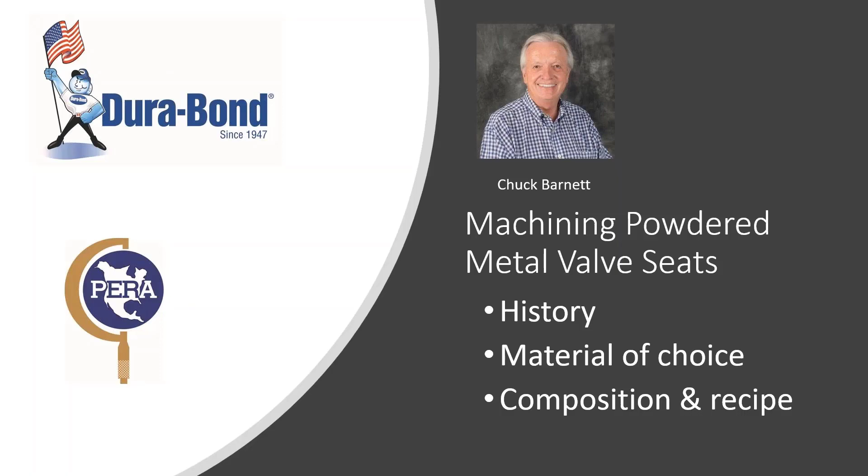Hello, I'm Chuck Barnett, the owner and president of Dura-Bond Bearings. Today, we thank you very much for joining us. We're going to talk a little bit about valve seats and the valve seats of importance going forward. Fortunately, Dura-Bond has been in business for 70 years, been making valve seats for 30 years, and the valve seats are a unique type of product that is really important for you for new technologies going forward.

So with that, we're going to have a little presentation on the pieces of valve seats, which I'm going to go through, and then we'll talk about some other things after the fact. I think all of you know Chuck Lynch through his work at Jasper and AERA, and he's been a great stalwart person of the industry. So I can tell you a lot of things about valve seats, but at the end of the day, what I call the rubber meets the road, that's where we're going to have Chuck Lynch, and he's going to talk about some of the things about machining, which is the critical part of all this.

So a little bit of the history again of powder metal valve seats. It's been around for a long time. Again, we've been making them for 30 years. It's pretty much a standard commodity in all OEs today. The beauty of the seats is it's not a product, it's a process. That process of powder metal valve seats takes a whole lot of different types of materials put together in a cold form. They're compacted at 100 tons, and in that compacting process, the material stays the same throughout the whole process. So all the way around the valve seat and all through it is the same thing.

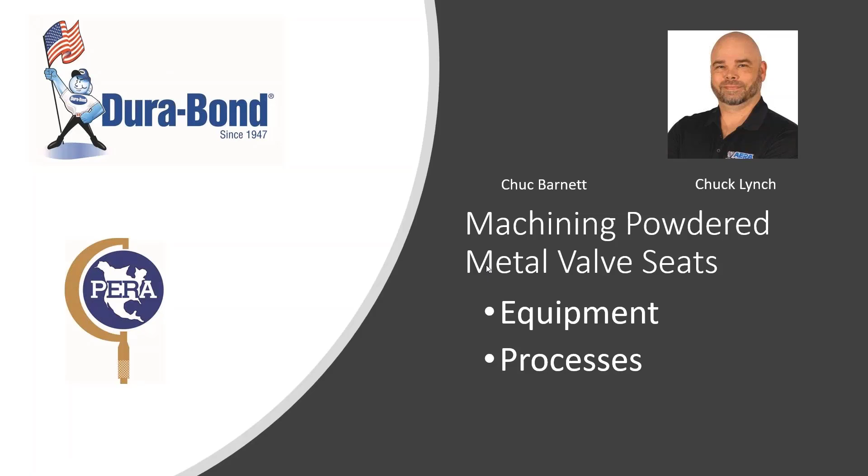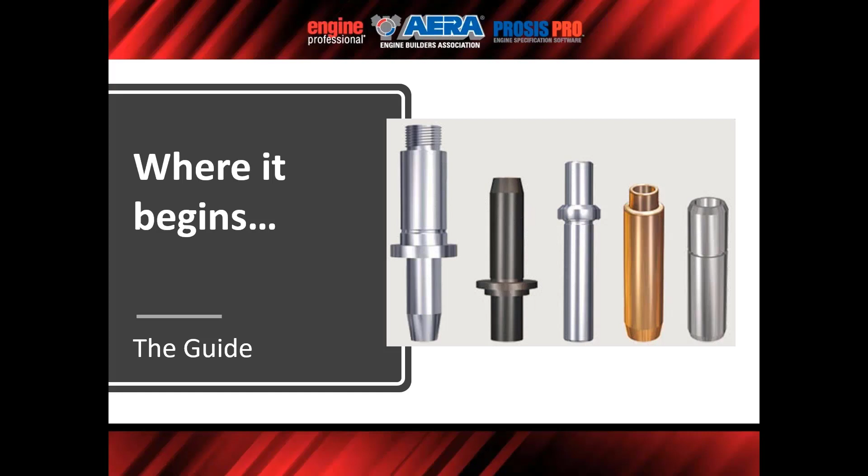All right, good day everyone. Let's get started with where it all begins, because I know there's several people listening today that we've had these conversations with multiple times. We chase after cylinder bore finishes and making cylinders absolutely perfect. We'll fight valve seats, and oftentimes it begins with a guide not being properly machined or prepared for doing valve seat machining.

You cannot produce accurate valve seats if you do not keep the guide processing under control. Can't speak to that enough—it's a super critical point of trying to get good valve seat machining. If the reference point for the seat is subpar, the seat quality will suffer. The following points are some of the symptoms that you will treat if you do not address the root cause.

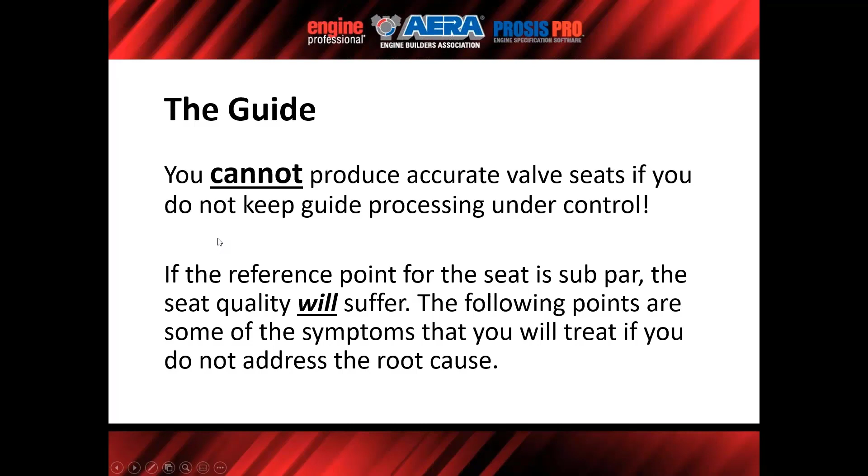So let's get into the guide types. We've got powder metal, which is the predominant material of choice in OE head castings now. Oftentimes we have to deal with the fact that they come in powdered metal, and we may not have that as an option. So when we replace a guide, we're going to be way off of alignment from where they were at the OE level. There's also cast iron alloys, and bronze alloys—solid, or in many instances, people will actually put a liner in a guide. The guide material can impact the amount of stem-to-guide clearance required, but it should not be considered when establishing your taper and out-of-round tolerances for the ID of the guide.

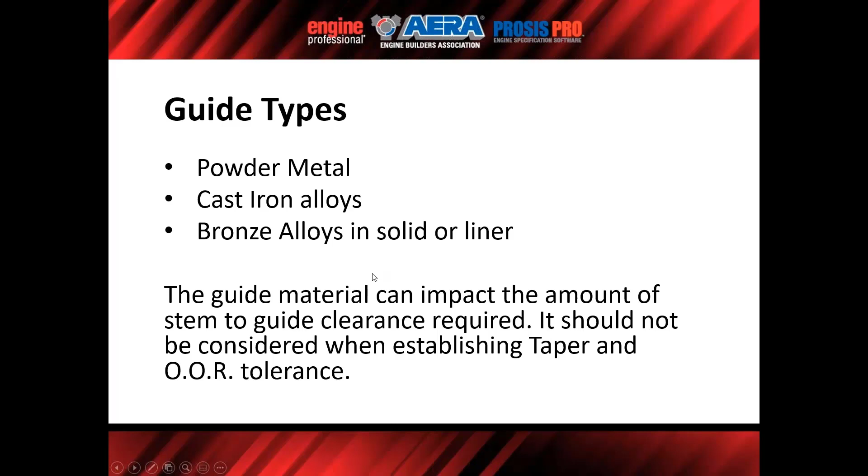So basically, your geometry allowances shouldn't be affected by your guide material choice. But again, it can impact what you choose for stem-to-guide clearances.

This would be a typical guide ID and taper tolerance. You'll see, based on whether we're using SAE or a metric specification, about 4 to 5 tenths maximum variation allowed in the guide. The further the seat is away from the guide, the greater the issue of taper within the guide. If you have that amount of taper, it's just going to aggravate your ability to locate—say if you're using a seat and guide machine, or if you're grinding seats, it's going to aggravate your ability to locate on that guide. We speak often to tapered pilots, but that's not really the purpose of those—it's more about getting to secure the pilot in the guide.

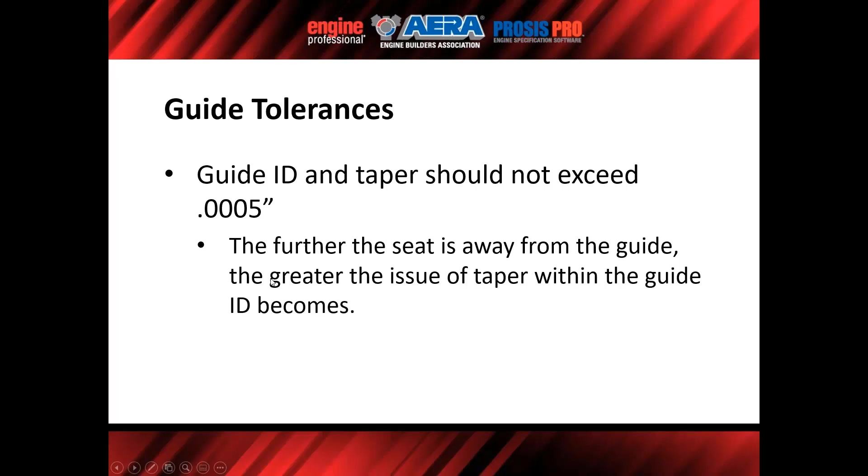So: seat issue, guide cause. Random seat runout measurements, chatter, differing results if you regrind or recut a seat, poor or varying vacuum test results. Let's start at the top—random seat measurements or runout measurement.

If you have guide sizes that are all over the place, and you're trying not to select multiple pilots for productivity's sake, you can really chase locating issues. That said, it's probably going to be indicated in your seat runout, but if you're not measuring seat runout, you may have leakage issues that you chase.

Chatter—again, it's about rigidity. So you want to have good straight guides, good pilot selection, and all of the things that you can do to make your setup extremely rigid will impact your finished seat results. Chatter, undulation—things that we'll talk about in some future slides.

If you cut the same seat multiple times or grind it, and the high spot moves around, there's a list of things that could be the problem, but you have to have a consistent, straight, true round guide to locate—to use the term repeatability and reproducibility, R&R. You need repeatable and reproducible results, and you have to have a straight guide before you can make seats that'll yield that.

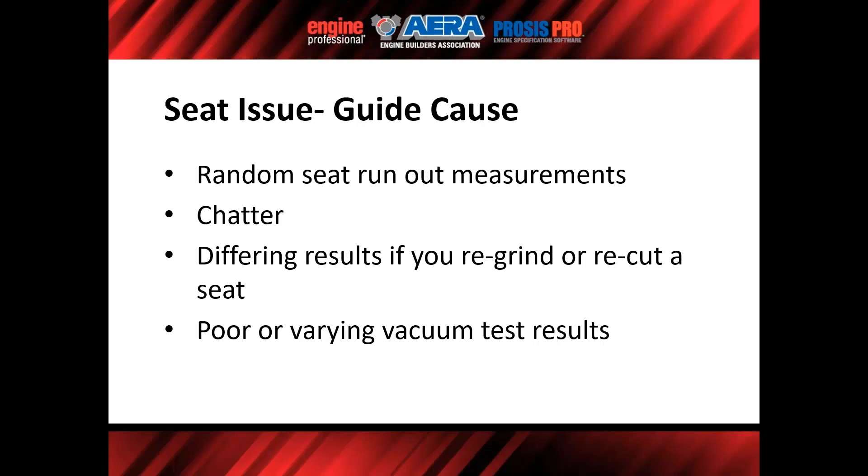Back to that—pilot selection should be an indication of the quality of the guide. If you're using more than 2 pilots per application, unless you're using the half sizes... as a rule, most pilots are 4/10 of a thou in separation from one pilot size to the next, but you can actually buy half sizes that are about 2/10. The guide sizing is not controlled well if you're using more than 2 pilots—if you think about that, that's about 8/10. Well, if my stem-to-guide geometry is telling me plus or minus 4/10, then I really shouldn't be using any more than 2 pilots per engine family.

If that's the case, go back and take a look and try to straighten up the guides. The pilot should be clean and free of debris when moving bore to bore, so centering is not affected, or the guides could be damaged due to seized pilots. So typically, as you're moving from hole to hole, if the opportunity presents itself, take a rag and wipe off any debris that clung to it.

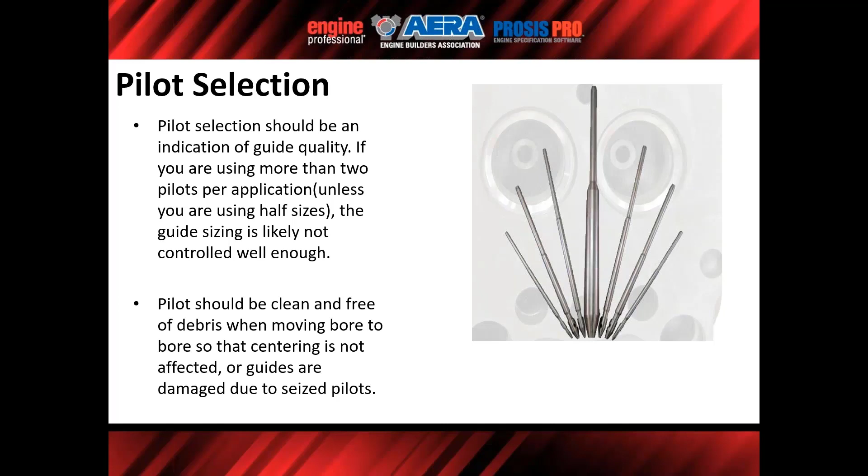You're using lubrication a lot of times, so it's pretty common that you're going to have hard particles. As we talked about powder metal seats, some of those hard particles, if you carry that into a guide bore and spin it against a carbide pilot, you can do a lot of damage to a valve guide.

So moving on to the valve seat, and I do want to mention, we talked about this prior to the presentation. Feel free to interrupt at any time, that way we're thinking about that particular subject matter at that time. So if you have any questions, please interrupt.

So what is the purpose of the valve seat? Of course, number one, provide a combustion seal. Very important part, as Chuck mentioned in his part of the presentation, transfer heat from the valve head into the casting and of course to the cooling system.

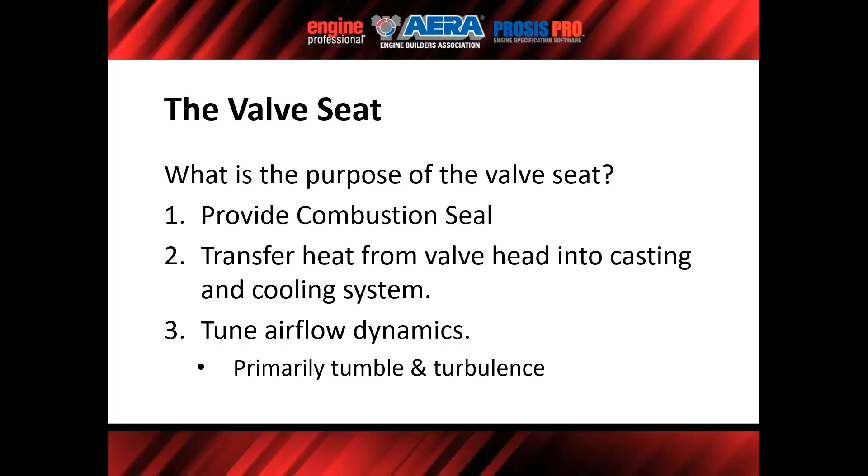And why do we have different seat angles? They tune airflow dynamics, primarily tumble and turbulence. Swirl is more controlled by piston and runner designs and so forth. But tumble and turbulence is very much needed in certain applications to help atomize fuel, so the valve seat can be instrumental in improving those characteristics.

So the primary function of the valve seat being combustion seal, the following points are important to ensure that function. A common rule is valve seat runout or concentricity is less than 1/1000th per inch of seat diameter. But here's the caveat to that.

As we look at engines today, we're seeing tighter and tighter stem-to-guide clearances. So if you have less stem-to-guide clearance, you're going to need to allow less valve seat runout. If you have a seat or valve that's 1.9 inches in diameter, and a guide set up at 1/1000th stem-to-guide clearance, the valve manufacturer also has a tolerance on how much runout they can put on the valve.

You are definitely going to have stem-to-guide contact, and that load is going to accelerate guide wear. So really think about what your stem-to-guide clearances are when you're setting your rules for valve seat runout.

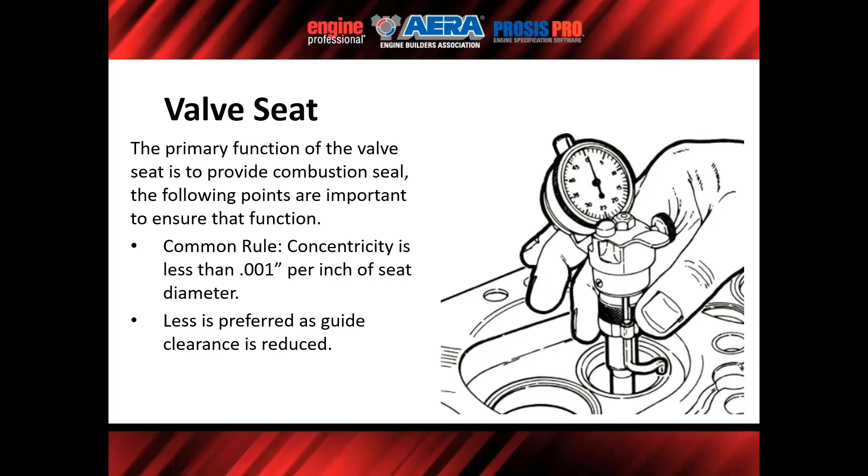So valve seats are often cast alloys, but powder metal or PM products are increasingly common. In automotive they've been around for a long time, but now you're seeing them in heavy duty. Chuck mentioned the Power Stroke diesel. In industrial applications, a lot of those were cast alloys, stellite, real high nickel compositions or something. Now you're seeing PM products in those applications, and they hold up very well.

As Chuck mentioned, you can use materials that are non-weldable, so you don't have the micro welding and the seats being pulled apart. Years ago when the LP conversion started, you did away with valve rotation because you knew you'd have micro welding as it tore material from the valve seat. That material would rotate, and now that's the only area actually contacting, so you'd have extreme leakage, and now you've got this piece of material stuck to the valve working like a hammer. You've lost seat contact, heat conduction is lost, and now this little tooth goes around and picks the seat to pieces.

So it's nice to see we've progressed with these compositions that will live in any of these environments. I think everybody wants this. Had a conversation just this morning about seat selection, and there is no single seat that's correct for every application. I think we've tried and tried and tried. The reality is, given the products, how these engines are engineered, and the application they're going to be applied to, we haven't got to the point where there's a seat that's correct for every application.

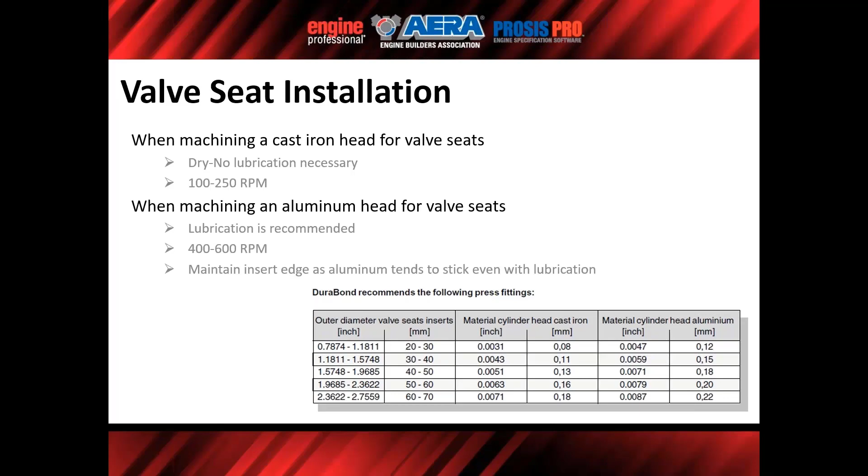Hey Chuck. Yes. Can you go back to the two slides prior when you had the copper seat? We have Claude asking, can you explain the copper wafer? Is this on top, bottom, or sandwiched? And how is this machined to spec? Okay, so actually this is one of the Dura-Bond...

This is one of the Dura-Bond advertisements that they use. This copper wafer is part of the manufacturing process. When they get the near net seat, it's typically 15% copper infiltrate. That gets put on the seat face surface, where it would contact the valve, in the manufacturing process. Then as it goes through sintering, that copper actually leaches into the seat and gets pressed, so it's integrated. This is just an illustration showing a copper infiltrated seat, taking a typical seat composition and adding this copper. It's not going to look like that when you open the box. I hope that answered the question.

I think it does, Claude, but if it doesn't, let us know please. Thanks, Chuck. Sure.

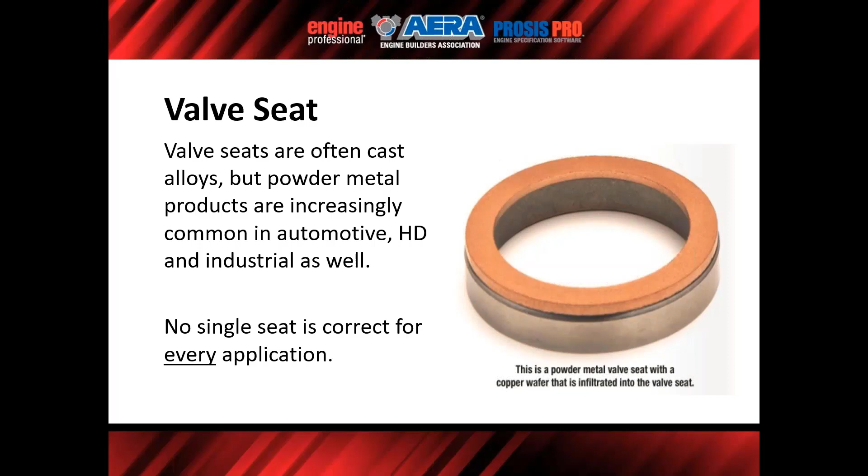So, methods of machining valve seats. By and large, I think most everyone has moved or migrated to cutting valve seats, but there are many still grinding seats, and effectively so. It just takes patience, practice, and knowing what to look for, and you have to check a lot more. A form tool is always going to put the seat in the same place; if you're grinding, you have to make some adjustments. And because you're creating a lot of abrasive, you've got to really watch your tooling.

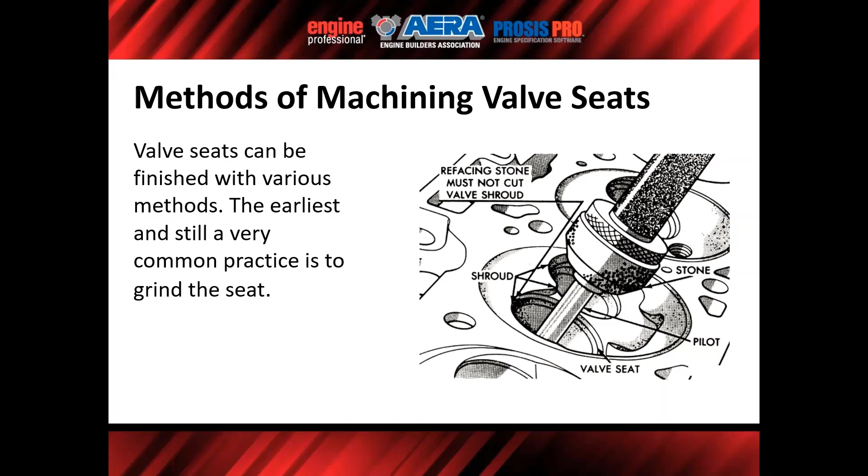If you take a look at grinding, consider this question: can I hone that Duramax with my vitrified abrasive because it's got those hard spots in the cylinders? Well, think about this: what is the most precision process that we ever do? When something gets really, really precise, we grind. So if you look at honing with a vitrified abrasive in that Duramax application, I'm really just reverse grinding. It's very capable of doing that. And when it comes to grinding valve seats, even though it takes a lot of effort compared to a seat and guide machine, you can still do it, very effectively, and you can yield all the parameters you need to ensure a good seat face contact.

Moving on here, when grinding valve seats, the following points can help you select the right abrasive for the seat type.

I know there are a few different suppliers out there. With Goodson on the tech line, they'll have a lot of conversation with you about the seat materials and what you're trying to do. They have people on staff that can help you select the right abrasive for the seat if you're kind of new to this.

Steel pilots can be quite the cost advantage, but they are easier to bend. The bad thing about carbide is it doesn't bend, it's going to snap on you, and they wear more quickly than carbide, so you can't reiterate this enough.

When you start chasing your tail, we tend to not like the sticker price of some of the tooling we have to replace, and think 'it can't be the tooling because it's always been good.' Well, it doesn't just wear out overnight, so you've got to keep an eye on your tooling for damage and wear.

Simple things like orientation matter too. If you're trying to get the max life out of something, you need to keep track of which side you always put to, say, 9 o'clock or something of that nature. If you have random setup processes, you can chase your tail, because that's just more variables thrown into your operation.

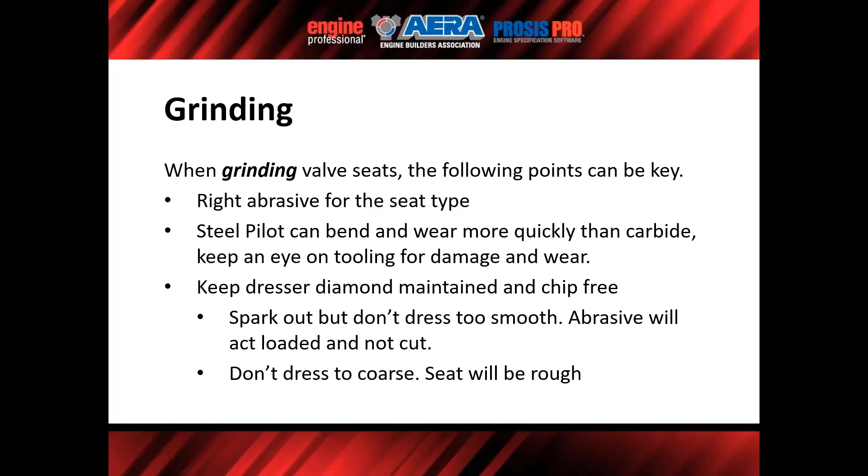For seat and guide machines, I've listed the most popular ones that are out there and being used today, and members of the group that we work with every day. So you see Rottler, Comec, Rottler Machines, Serdi, Newen.

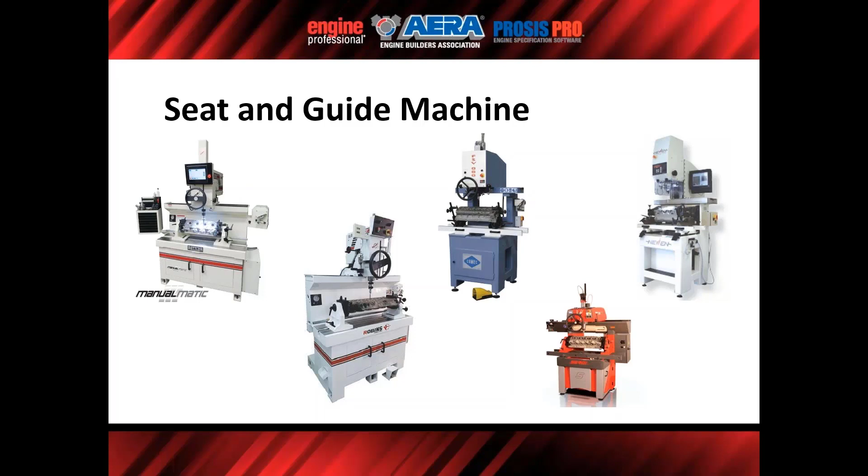Now, seat surface. I borrowed this slide from Newen—I actually like it. It gives us a good illustration of what happens sometimes when we're cutting valve seats. The desired surface is without chatter and undulation.

This is true of both the valve and the seat. Typically, you're going to look for a roughness of 30 RA or less. That'll be called out on most of your drawings.

Measuring valve seat surface finish is pretty tough. Some of the OEMs do actually measure that, but for the average guy to go out and buy the fixture that'll hold his profilometer to measure valve seat roughness—it's just not commonly done. But there are parameters around valve seat roughness.

The seat width is based on the application. You're not going to run an intake seat width as wide as you do the exhaust. Why is that? Because the more contact area, the greater the heat sink, so I can dissipate more heat.

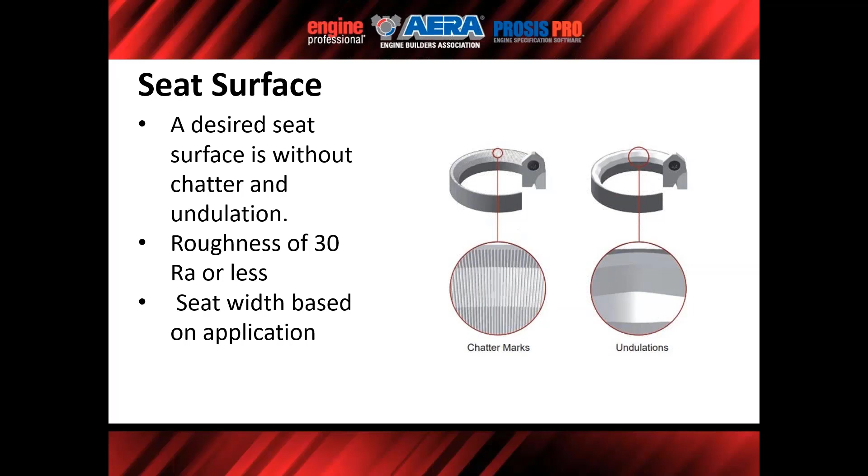With seat and guide machines with steering wheels, feed rate cannot always be controlled accurately. That said, the seat diameter and tooling grade will still control the desired RPM.

This chart illustrates suggested speeds for carbide form tools. You can take a look there—seat OD and RPM range—and then look at some cutting angles and relief angles. If you take a look, Serdi's got some unique tooling now; they've got more rigid, heavy-duty stuff.

Robin Cheerer with Rottler Machines has actually been working on some of the Ruby material as of late.

That's something we're constantly working on in the industry to try to improve longevity, so that you don't have to sharpen so much, because that is an area where we start to create issues with our sharpening processes. Some places have it really nailed down because they have very specific equipment, and then some shops it's more of a manual operation, so it lends itself to potential inaccuracy and a great amount of variability.

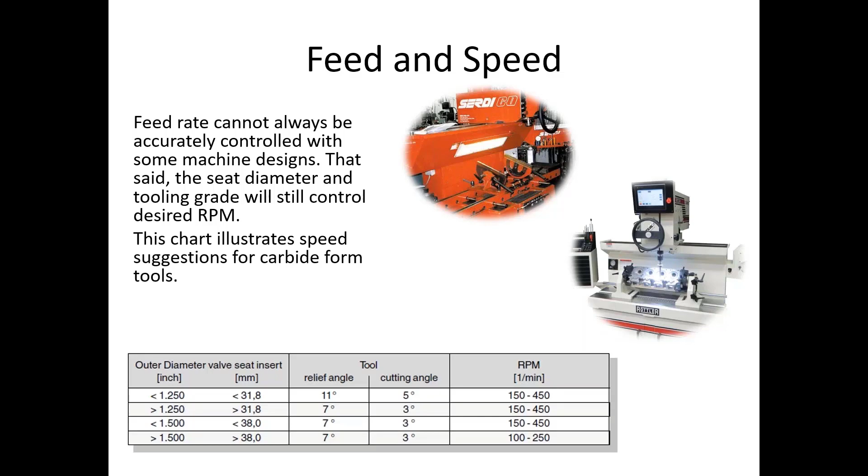Some CNC machines are designed to generate a seat profile using a single point insert, which may be carbide, Cermet, CBN, etc. With that, you're going to run significantly higher RPMs.

Typically you're using super abrasives in these types of machines. So you'll see much higher RPMs, and the feed rate you can definitely control.

So you'll see that rough feed rate of about 4 to 5 thou. Think about that when you're using just a carbide on a machine with a steering wheel, where you have an insert profile that engages at 300 thousandths.

This particular insert, in most instances, has a 16 thousandths nose radius, which means you're probably only really contacting at 4 to 5 thousandths.

They actually have some profiles where you would machine on the bottom edge of the insert for your roughing, and then travel from the inside diameter to the outside diameter, so that you're using the opposite edge of the insert for the finishing process.

So it's almost like you have two separate cutting surfaces, and it's only cutting about 5 thousandths of material, as opposed to 300 to 400 thou.

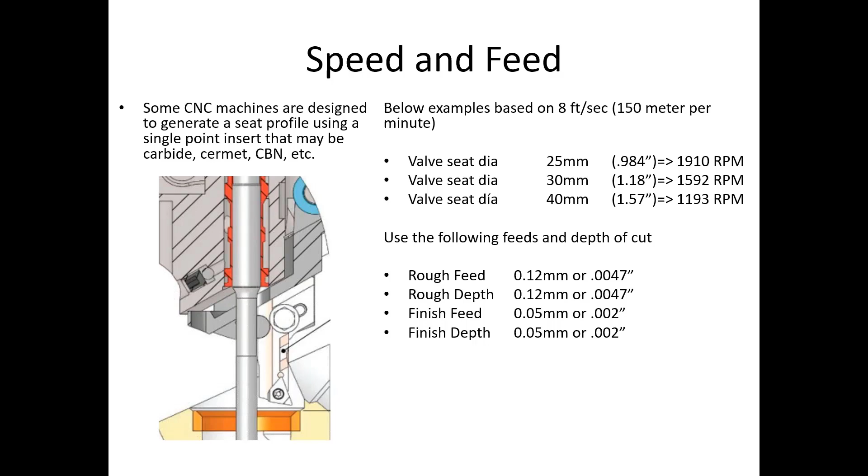As cylinder heads have evolved, so has the need for tooling. Some of the challenges are, of course, hard material, small stem diameters, and challenging seat profiles.

Sometimes we don't think about this, especially if we're a custom shop. It's something we actually added to the process: okay, how many valve seats per combustion chamber? Because I don't just look at that as an inline 4-cylinder anymore.

What if it's a Volkswagen with 5 valves per chamber? That's a lot of seat cutting.

So I'm asking my tools to do a lot more, and then you have head castings that are odd shapes and are hard to secure in the machine.

Going back to what I was saying earlier, if you run a live pilot machine in the tool holders, anytime you put a pilot in a tool holder that has a set screw pushing it off to one side, it's hypercritical that you know the condition of the bore you're putting your pilot in.

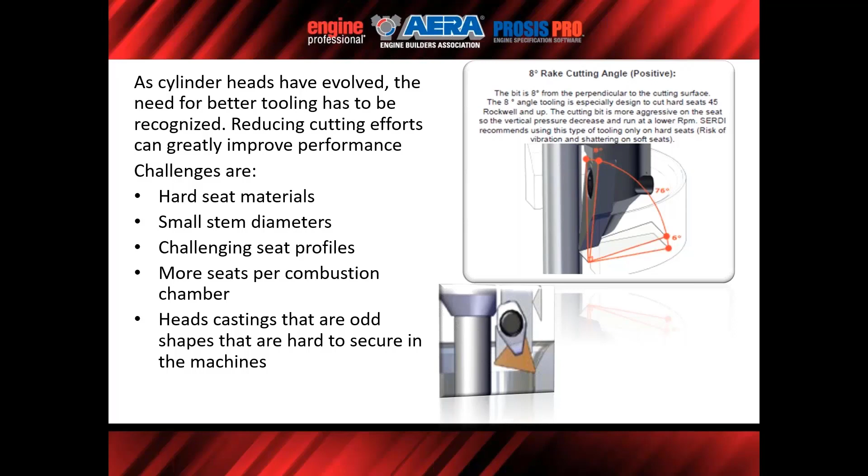So again, it keeps going back to, you've got to know your tools and maintain them.

So performance - poor sharpening can produce poor seat quality. There's also the toughness of the material to consider.

There are seat alloys out there that have a lot of nickel in them, and much like the aluminum we were discussing earlier, that's a tough, stringy material. What does it do?

It bonds itself to that insert, but that tough, stringy material also micro welds to the seat.

And you drag these chips in there, and as it welds itself to the seat, you leave these channels in the seat. Now what really happens is you're only contacting the highest points when the valve is seated.

So again, do you need a secondary operation where you go grind, lap, recut, or single angle cut - all things you need to consider.

Again, use the most rigid tooling available based on your application. Sometimes you've got a seat material that's beyond your application's need, so consider that too.

Hey, if it's an intake seat, I'm going to use Dura-Bond for their part numbers. If it starts with a 3 or 30,000 seat material, they're going to work in a lot of intake applications.

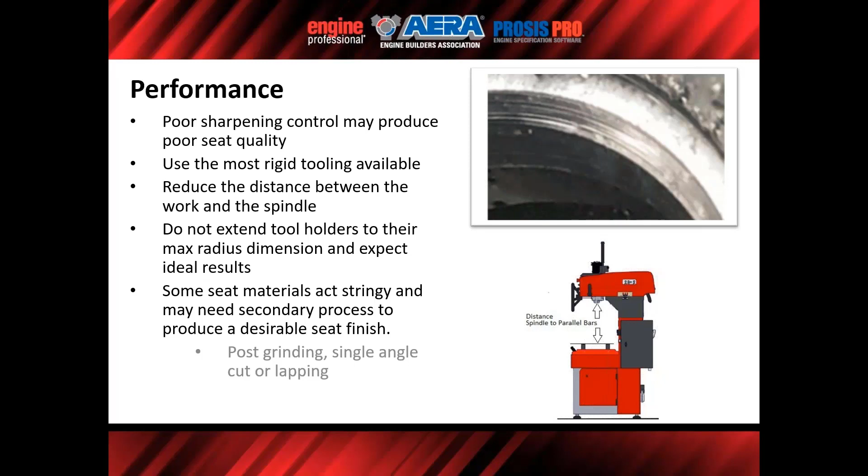So, form tooling maintenance: tool bodies have ID wear, OD wear. This is where the tool holder, the major body of the tool holder, would go up into the spindle. So you could get handling damage. For every action, there's a reaction.

If I hit that metal, beside where I hit it, there's going to be two areas that raised material. And then I put that up into the inner spindle, and out at the tip of where the pilot is actually engaged in a guide, how much tilt is that causing? And then if I turn it 180 degrees, I probably get a different result. So be aware of those type of things.

Pilots tend to wear more in the guide region. The insert pocket holder can lose angle. I've been fortunate enough to use something like an optical comparator and say, okay, this is going to be the gauge fixture or insert holder that I have to set a standard. And then I can take that same insert, put it in a different one, put it on the block, put it in the comparator, and find out, wow, I'm a full degree from where I should be, because again, you're applying a lot of load. So the area right out at the extreme edge, under where the adjuster screw is, and the screw that retains the actual insert, you can kind of break that material out, and then the insert wants to roll on you.

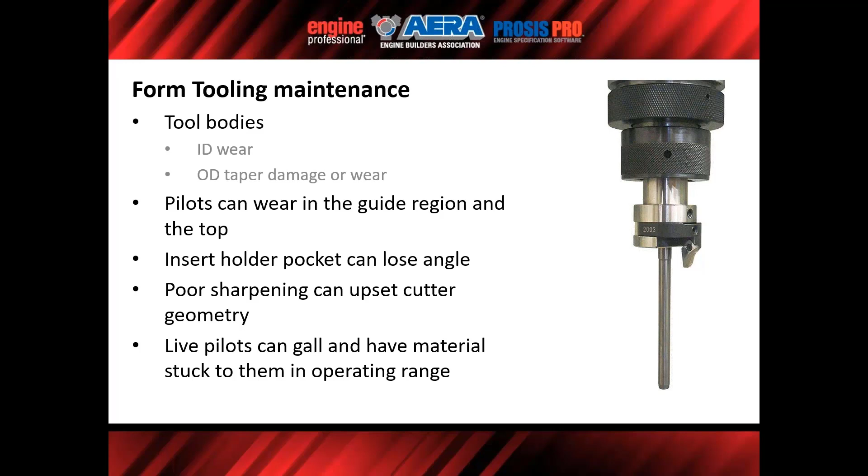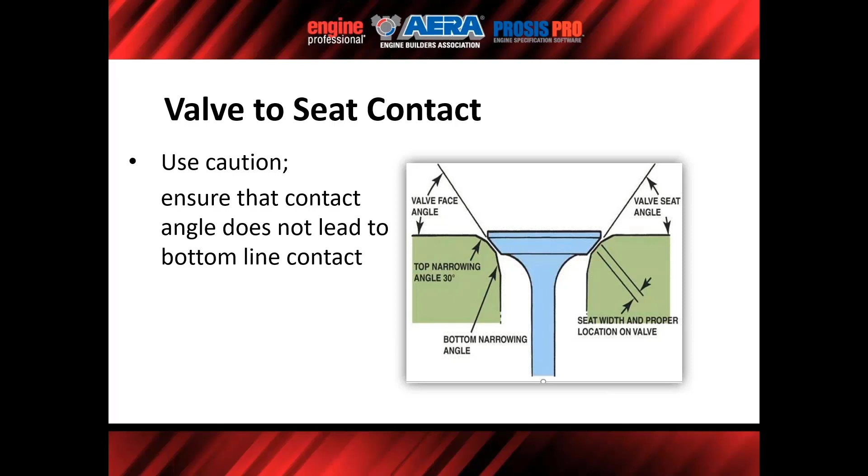Valve to seat contact is something a lot of people new to the industry get confused with. What is upper line contact or bottom line contact? Typically when you hear the term bottom line contact, it means closer to the stem diameter. If you're hitting closer to the stem diameter first when checking your valve seat contact, that's not good. If you have any interference angle, like in this slide, you want it indicated where it's hitting out closer to the outside diameter of the valve.

I see on social media sites people saying no interference angle is ideal. In a perfect world, it would be. Some valve design engineers will tell you that even if you have an interference angle, you're ultimately going to end up with full face contact.

But in a static state, it's impractical because the valve manufacturer has a tolerance, plus or minus 15 minutes or a quarter of a degree, unless you order something special, and then you're probably not going to want to pay for something with zero tolerance on the angle. There's always going to be a fight: well, at the factory I know my stuff is perfect at 45 degrees, so how do you test it when it comes in? There's always that argument.

But again, you're going to have a tolerance for the valve. The form tool cutter is the same thing. They're typically going to manufacture an insert that's got plus or minus 15 minutes or a quarter of a degree tolerance on that cutter.

Then you take a look at combustion forces, depending on head diameter, material, whether it has a compression button in the valve already. Low RPM, high RPM, under load, unloaded - you're going to get valve head deflection. Both the valve and seat must have better geometry with no interference angle. So if you start from the word go and try to make it zero interference, you better really have your ball game together.

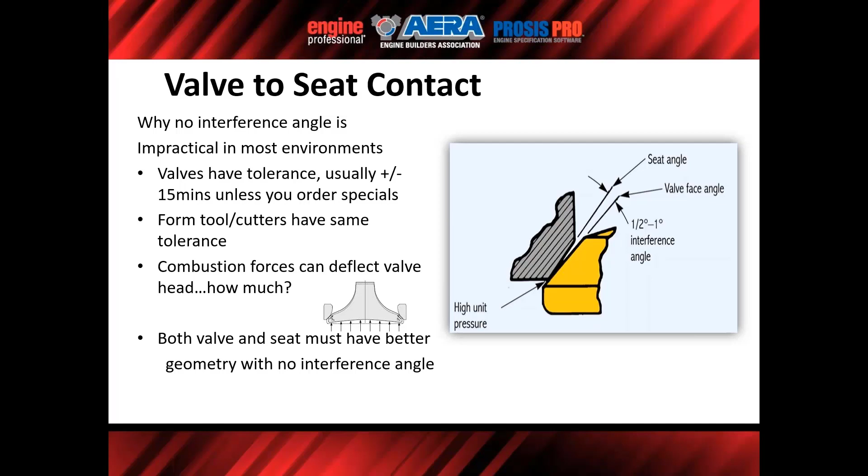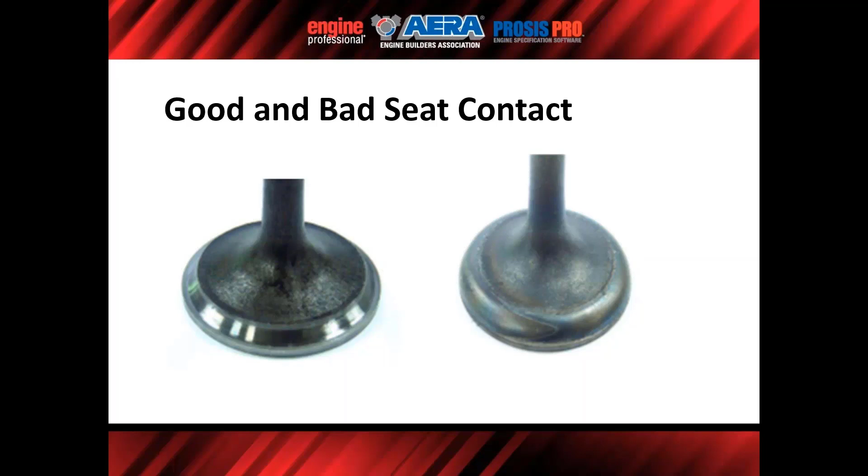So the bad thing is, what happened first? Did I have a bad guide that put me in that position, or did I have poor seat geometry that caused that and wore out the guide?

So why does this matter? Dispersion of heat. If heat is not transferred from the valve head to the seat, the heat stays in the valve head and stem and then ultimately goes out through the guide. The guide clearances are not calculated for such a large amount of thermal expansion.

If you take a look at the hot rod diesel world, a lot of guys - Wagler Competition, Fleece, Freedom Racing Engines, Scheid and so on - I've talked to some, and they run crazy stem to guide clearances because they know this is going to happen. But that wouldn't work on the street. You can't start with 7 thousandths in an automotive diesel world, you'd have huge amounts of oil consumption.

And again, the seat or the valve needs a good datum point. Those race engines are running on the ragged edge for a shorter period of time. If we want something that's going to last a long time, we need that location, that guide, that datum has to be accurate so that we hit the seat the same time or the same place every time.

Valve stems are not designed to carry a lot of thermal load, and hence from the mid stem weld to the valve tip is typically a lower alloy. It serves multiple functions. Most of your stainless type materials, your high alloy materials - 21-4N, Inconel, Nimonic, things of that nature, high nickel alloys - they don't heat treat well.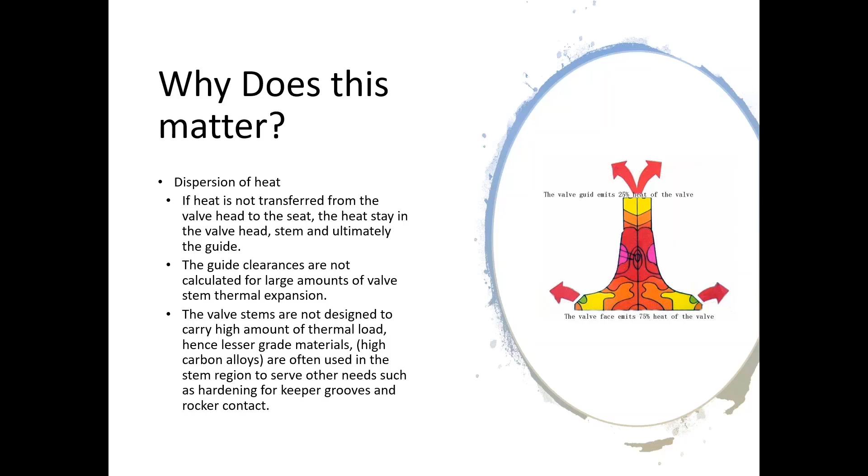And then vacuum testing—a lot of folks say, yeah, I don't need to check concentricity, I vacuum test. I will contend, and I'll argue this to the ends of the world, one without the other is not great, because concentricity can tell you what your machine's doing. You can check that R&R, that reproducibility, that repeatability.

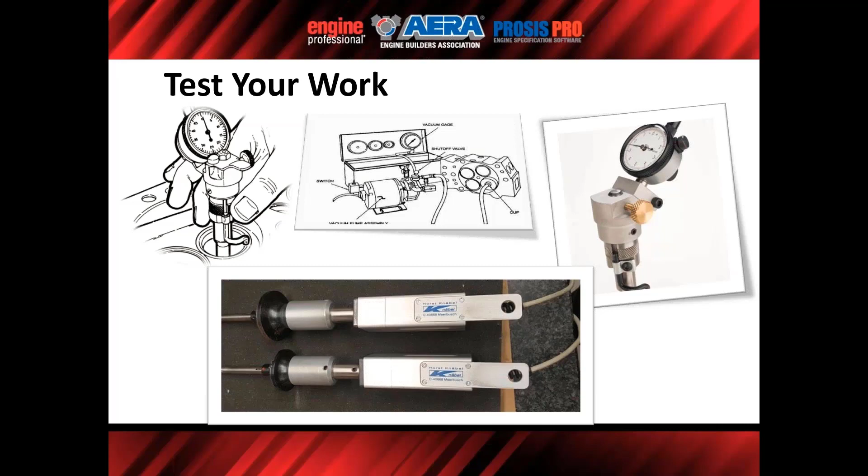Say if I'm cutting my seats and I take a marker and mark the high point left while cutting the seat. If it's always at 2 o'clock, okay, I probably need to adjust something on my machine. But if it's random, I either need to adjust me, or adjust tooling—I'm inconsistent in my process. Again, I'm kind of a gorilla, I need a torque wrench and a concentricity gauge to say, okay, your process is uniform, your machine's uniform, because probably a little too much torque, elbow. So again, use those tools.

So I got a little out of sync there, but why vacuum testing and measuring should both be performed: run out's a good way to check your machine. Run out may not catch chatter and undulation. Vacuum will not catch excessive run out if the guide clearance is large enough or the valve head is flexing.

25 inches of vacuum will collapse a steel oil drum. Ask me how I know—I said this at a presentation one time, and somebody happened to go try it because they didn't believe it, and that happened before I ever left the facility. So in fact it will happen. And if you don't think that won't deflect a small block Chevy intake valve, you're greatly mistaken.

And then run out—if I'm measuring valve seat run out, you're not going to capture the little nicks or debris that'll cause you a leak. The bad thing about debris is the first time the valve opens and closes doesn't necessarily mean it's going to go away. Oftentimes it does, but if there are hard particles created from machining powder metal stuck around the seat somewhere and get between the valve and the seat, not washed out, then that material—much harder than the valve—may embed itself into the valve face. Again, it goes back to that micro welding I'm talking about with the LP applications.

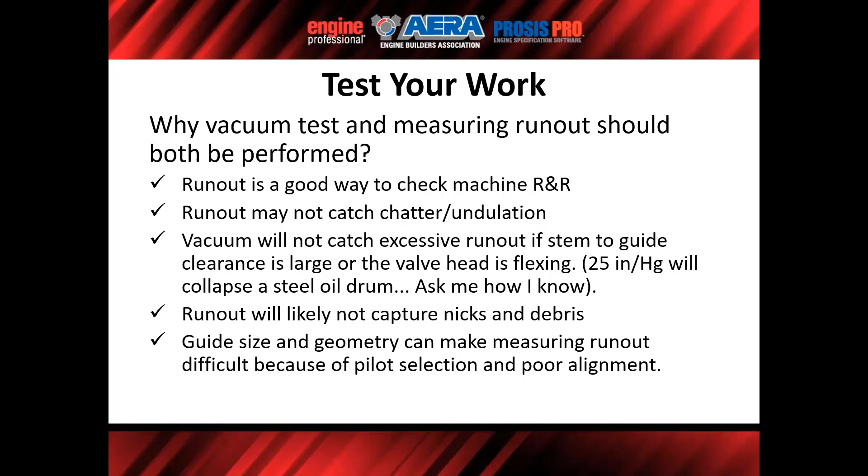A good example: in 2011, when the Ford Coyote engine platform started going into trucks, you'd see some of those come in where the intake valve, you could shave with it, it's beaten in so bad, but the seat looks perfect.

Some of the other factors are friction between the valve and the seat. That friction increases with combustion pressure increase, thermal distortion increase, as seating velocity increases. In the performance world, we typically want to accelerate that to eliminate some of the scavenging effects one to the other. Again, so we try to move the valve back to the seat very quick, for the duty cycle.

And then friction between the valve and the seat decreases with lubrication and protective oxides. So I've mentioned a couple of times CNG or LP applications, and that was always kind of the story there: hey, I'm using a dry fuel. That's really hurt me on valve seat longevity, valve train longevity, because there's no lubrication coming via the fuel.

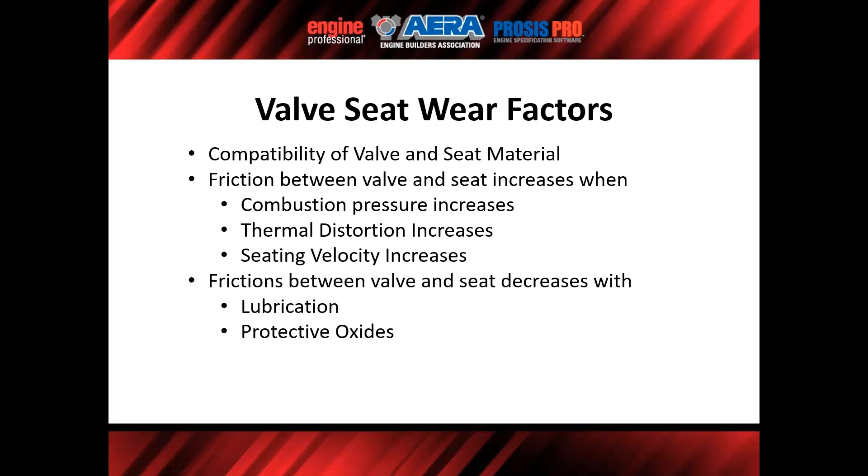Chuck, Donald has a question: please explain pitting on a seat or on the valves.

So the pitting, again, can often be like the oxide, so it's a corrosion in more instances than not. So actually here you see corrosive wear, but pitting is often corrosion. So something nasty in the environment of the combustion event. Is it fuel? Is it created by the timing process, so the burn's not efficient? Is it ingesting coolant? Is it the quality of the fuel in your area? But more often than not, the pitting is corrosion.

So moving on into the valve seat wear factors, you have adhesive wear, which is the micro welding. Abrasive wear, which is most common, so that's misalignment of valve to seat. Surface roughness, pressure from combustion, closing energy/velocity, and then corrosive wear.

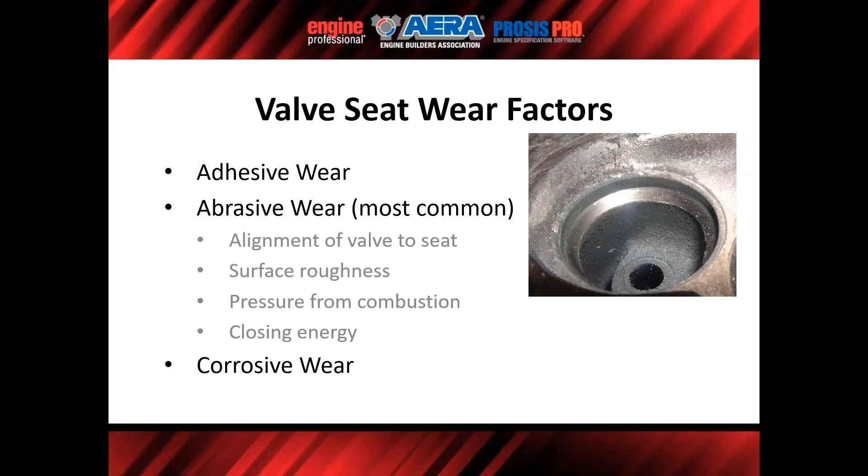Hope that answered it. That was pretty good timing for the question. Very good, Donald. Thank you, Chuck.

All right, so adhesive wear, the micro welding, again, comes down to: do I have the right seat material for that valve material? So now I'm battling micro welding. This is just kind of a blown up view - you can tell you have some nice flat surface area, and then areas that are pulled out, due to localized bonding between contacting solid surfaces.

Again, just reiterating: poor lubrication, high stress, wide hardness differential between the valve and the seat, surface roughness which increases friction, and could be heavy duty cycle without break-in.

The thing about break-in in the world today - we've talked about this in piston rings for a long time - is that we've migrated to materials and bore finishes and stuff that rings don't really break in like they used to. And that's what's happened with valve trains too. You really have to have your valve seating right from the word go, because valves and seats don't just wear and match one another like they used to. You might change surface finish, but if you have concentricity issues, it's probably going to propagate itself into guide wear or valve failure.

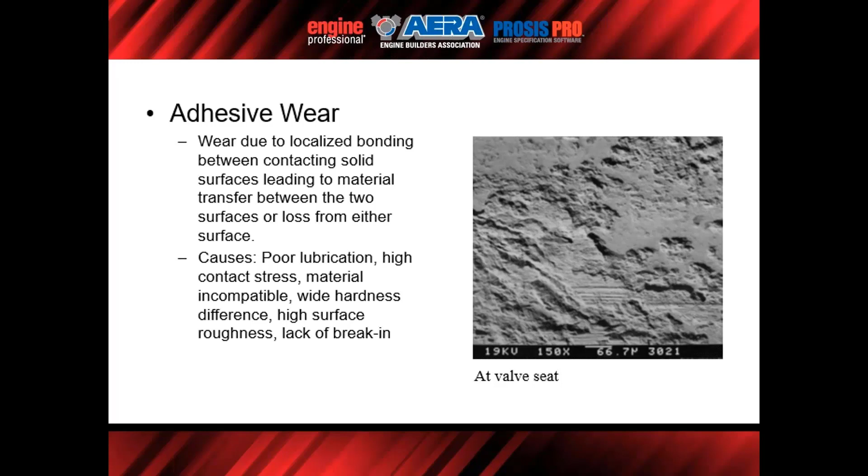So, valve seat wear prevention. Valve geometry considerations would include reducing the valve seat angle, common in CNG and LP applications. Is that practical? Typically not. Then you have to design the cam for it and so forth.

Diesels used to have reduced angles because if they weren't turbocharged, if you take a look at that cross-sectional area, with a 15-degree valve seat, a 30-degree valve seat, or a 45-degree valve seat, that cross-sectional area is going to be greater with the 15-degree valve seat. So they're trying to take advantage of the lift and the reduced restriction of the area when you've got a 15-degree valve.

Another thing you can do to help the valve is increase the valve head thickness. But that adds weight and cost, and then it's harder to do a compression. You see a lot of the gas engines, like the modular Ford 4.6, 5.4, 6.8 V10 - the margin area of the valve is extremely heavy, so that they get away from what I was talking about earlier, where heat runs to those fine lines, thin areas.

So, reduce valve head diameter. You take a look at 2 one-inch valves in a combustion chamber versus 1 two-inch valve - you can still flow more air through the area over those 2 one-inch valves. So I can reduce that head diameter, reduce weight and closing energy.

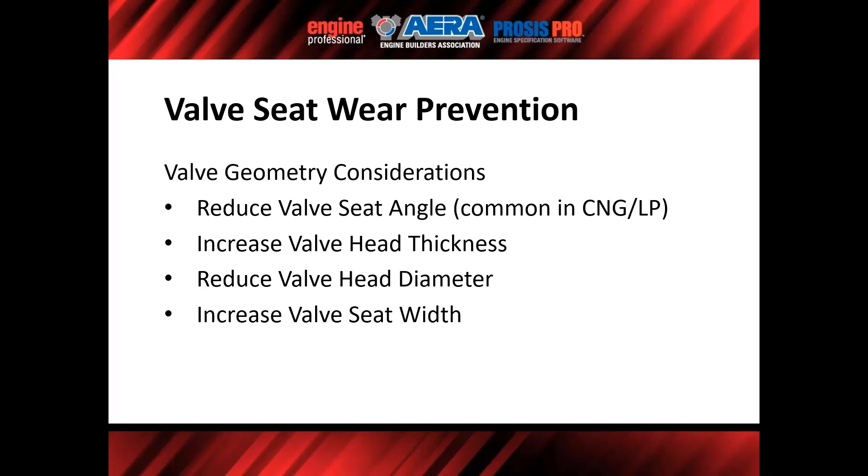So, valve seat wear prevention through valve train design considerations: increase valve train rigidity, reduce weight. Some of the things in rigidity you've seen go away over time and then come back, say like spring dampers.

The length of the guide - you want to give a valve as much guide length as you possibly can to control the valve and have that good datum so the valve hits the seat the same every time. Of course, seat materials and so forth.

Valve train weight - we've chased that forever. I think that's why you see so many engines have gone back to solid buckets. Reduce valve seating velocity - how to reduce lash, cam lobe profiles - to make sure the valve is not being snapped against the seat with such energy. Again, it's a fine line you're trying to walk. I want to take as much advantage of that combustion or pressure-making event as possible.

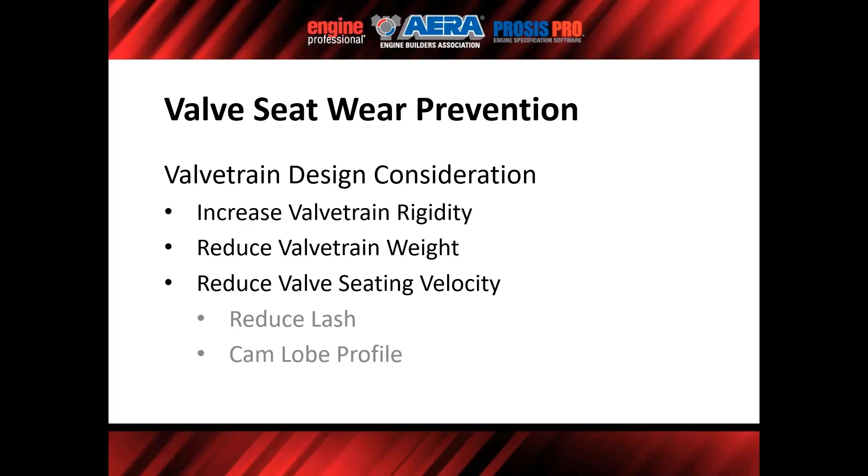But I don't want closing velocity to beat my valves and seats to death. So everything's always a compromise. I always said it was amazing that an engine that's constantly trying to blow itself apart every cycle - for every positive action, there's some kind of negative action you're countering. That's always the consideration.

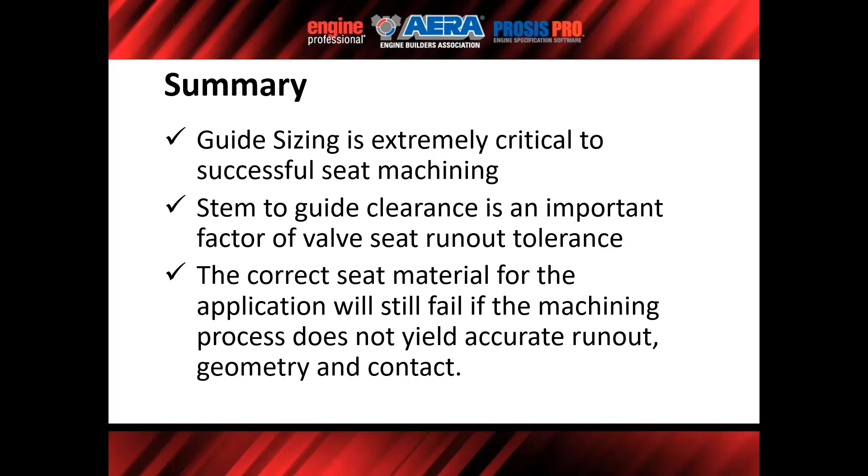So in summary, guide sizing is extremely critical to successful seat machining. Stem to guide clearance is an important factor of valve seat runout tolerance. Correct seat material for the application will still fail if the machining process does not yield accurate runout, geometry, and contact.